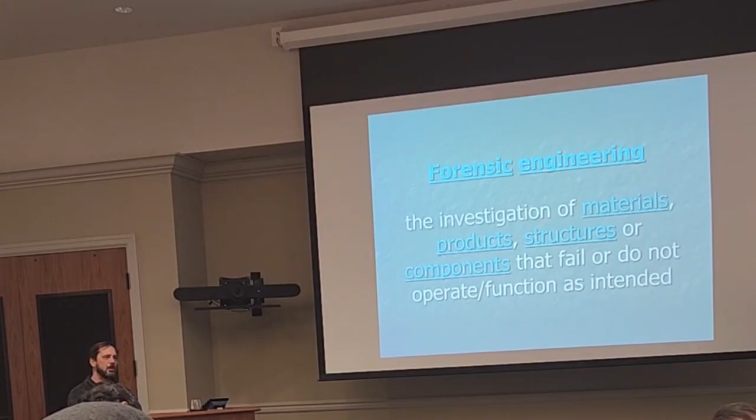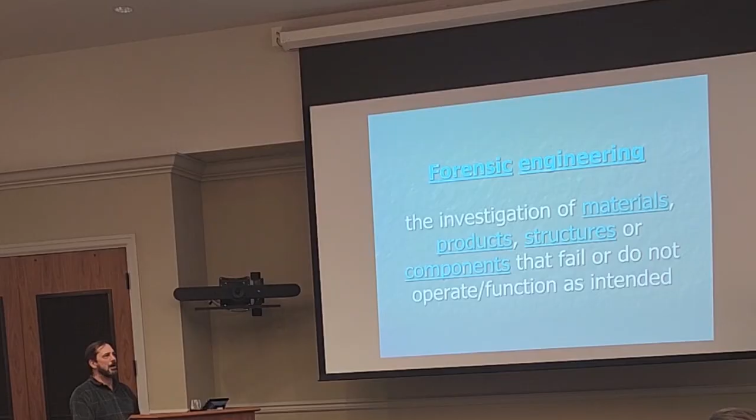Okay, so what do forensic engineers do? I kind of got into this in the Air Force a little bit. I was trained as an accident investigator. I've always been fascinated with figuring out the cause of failures and problems. And my background is in civil engineering and structures, and so forensic engineering is basically the use of that knowledge. I just apply that causation analysis to buildings instead of airplanes.

Just as everyone understands the scientific method, basically the whole process is to gather the information that you need, create a hypothesis, get your evidence to support that, interpret that, follow the facts where the facts may lead. Don't let your opinion drive the analysis, let the facts drive the analysis. Draw conclusions and publish the results. Of course, that's just one of the basic scientific methods, and that's what we have to employ.

But in my faith, I've learned that none of this would be possible if God had not created order in the universe. Because God's order makes the scientific method even possible. If there were not laws of nature, we wouldn't be able to recreate experiments and such. So, even in Romans 1:20, St. Paul is talking about that. Of course, he's addressing this to folks who didn't quite understand the concept of God.

We could probably use a little bit more of this kind of quote in today's world: ever since the creation of the world, His invisible nature, namely His eternal power and deity, has been clearly perceived in the things that have been made. So, if you can't see God, but you're looking at creation, you are seeing God. You're seeing Him through His creation. And so I let my faith guide my values as far as my work, and I'm going to talk a little bit about that today through some case examples.

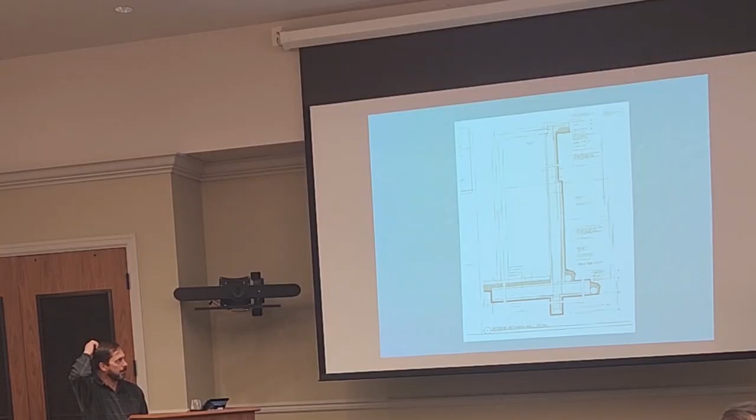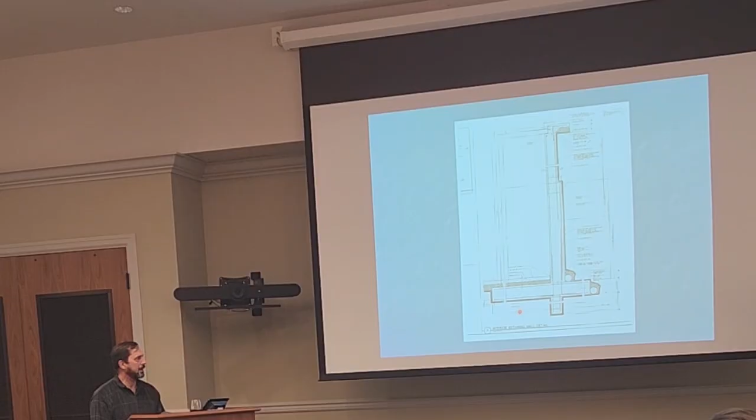The longer portion is actually on the inboard side, the loaded side of the dirt. So the dirt's going to go up on this side of the wall. A lot of times you'll see retaining walls, and the way they build them, the dirt will be on the other side with the longer stem acting as a sort of a retaining. But long story short, that was the question: was the wall not properly designed? We went through, here's what happened.

Very large structure. It was under construction. They had a huge rainfall event that came, basically washed in and collapsed a portion of the retaining wall. So we were hired to figure out, whose fault is this? Is this the designer? Did the contractor do something wrong? What's going on there? And we went through the analysis and found out that the wall itself actually was well designed. It was well constructed.

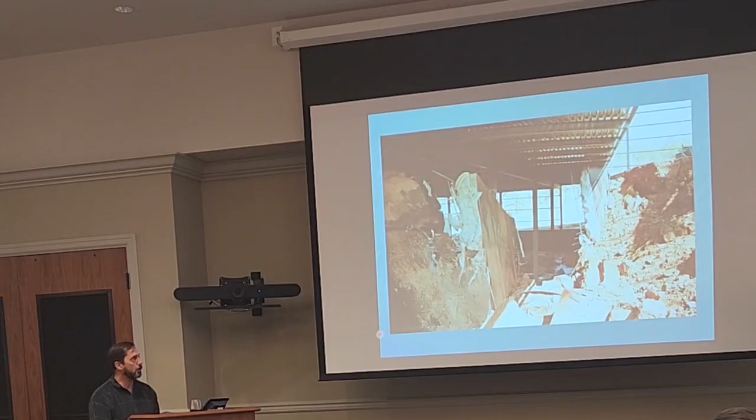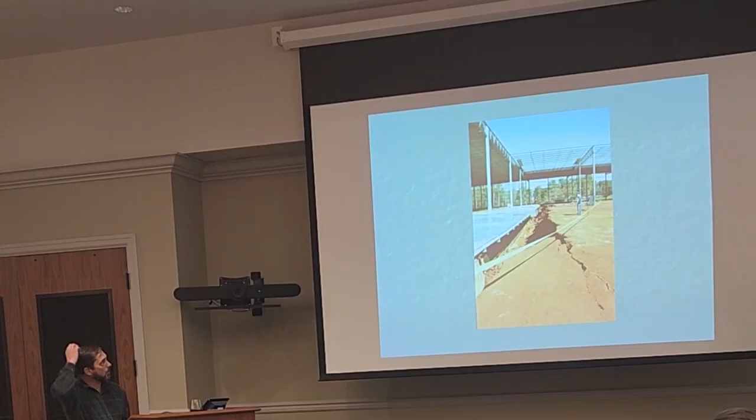This was the problem. This is the photo that kind of gives you the clue. The building is under construction, and as I said before, you can kind of see where they already put the roof decking on a portion of it, but not the full area. This area that you see on the right-hand side that's open was eventually going to be paved and covered. So the retaining wall was never designed to withstand any water load. It was designed for the soil load only.

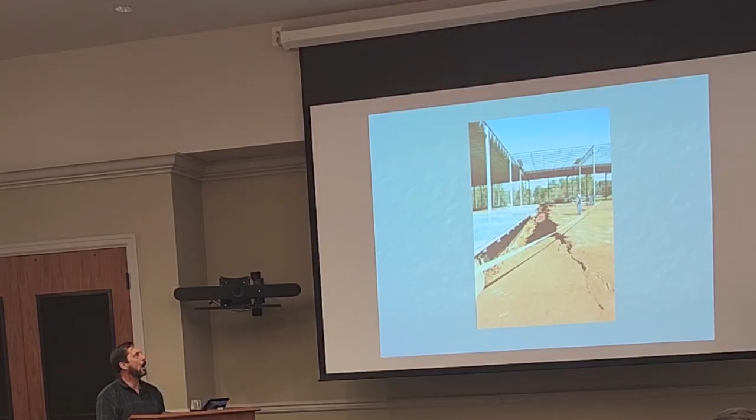And what ended up happening, there's another picture of the thing, was that you had this rainfall event during construction that loaded and saturated the soil, causing a surcharge that fractured the retaining wall. It wasn't able to keep up with that.

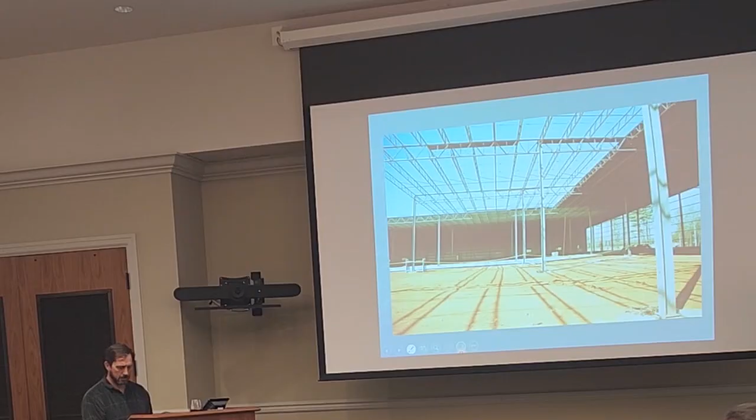Anyway, interesting thing there. This is another one way back when, Hurricane Katrina, 2005, I think it was. The Hard Rock Casino was being built. Back in Mississippi at this time, you could gamble, but the gambling had to be done on the water. It couldn't be done on the land, it had to be on a vessel. So they went to great lengths to construct the Hard Rock Casino on the water,

and the hotel portion and all of this entertainment was on the land. There's an overview of it, and you can see here's the structure we were just looking at. There's the giant guitar. They had a facility, a floating barge, moored permanently with a structure over the top of it, in order to be in compliance with the law.

And so the building never opened. It had just been finished about 3 or 4 days before Hurricane Katrina. The governor was down there and they were breaking the champagne bottle, getting ready to open up. So it was brand spanking new. Hurricane Katrina came through and wiped it out. So this is what it looked like after the event. And of course, this was an insurance claim.

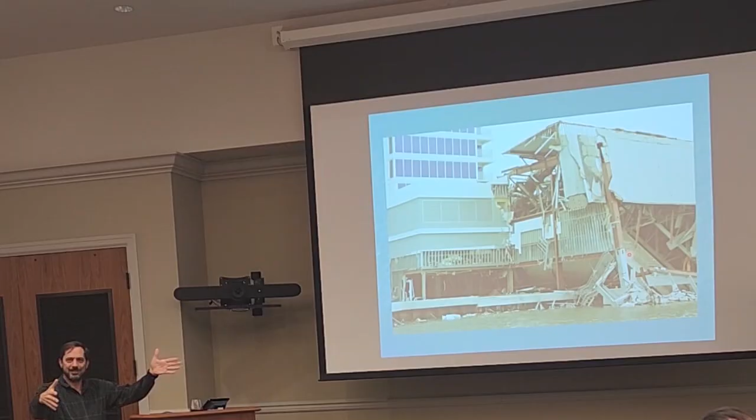These tanks or containers were designed to pump water out or pump water in to maintain a perfect level with the floor as the tide came in and out. So as the tide was going out, it would pump water out so that the floor would stay level with the entryway. It was very high tech, pretty cool.

This is a view looking down on the barge. You can barely see it, but if you look close, you can see some of the slot machines, never been used. They were full of money. They had cops out there 24/7 because this was like Looter Central. This would have been the part with the mooring, if you will. This was the portion of the roof right here. You're seeing the roof of the actual shed structure that covered the barge.

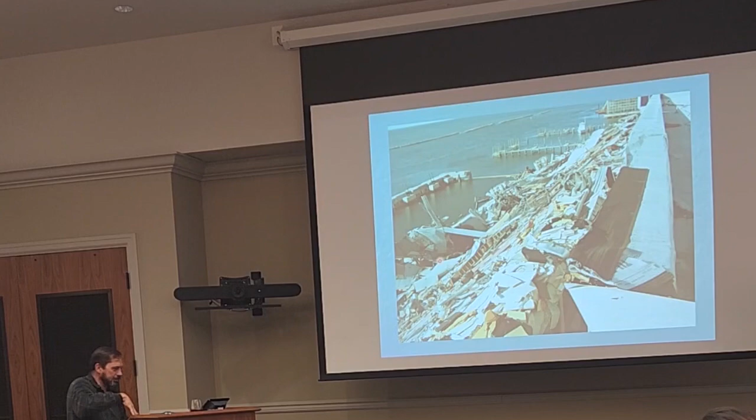It was detached and sitting on top of the barge, and the barge was now sunk into the water there. There's another view of that substructure I was telling you about. So next door was the parking garage, and it was three stories tall. On the second floor of the parking garage, the concrete exhibited evidence of uplift force. Okay. Concrete is great in downward force; you can drive cars across it, but it's not too good going up.

So we're looking at this going, okay, what's strong enough to heave concrete up? Probably not wind on an open structure where the wind's going to blow right through it. Probably water. So this is what it looked like looking land side. And off in the distance there were a couple of apartment buildings right across the street. So we went over there, took a look at the apartment buildings, went up to the second floor of the apartment building, and measured this from the ground level.

What you're looking at here is, see these little things in the wall? See how it's like a perfect line? What do you think that is? The flood line? Yes, it could be a flood line, right? But normally a flood line is identified by dirt, detritus, things like that deposited. You didn't really see that much, but what you're looking at here is where the furniture had been floating and banging into the wall. So that is a flood line that was created by the furniture.

So we were able to get a positive identification of the height of the flood level and kind of track it back, and it was quite clearly the barge floated up, detached its own roof, floated over the top of the moor, and then when the flood receded, that's what caused all the damage.

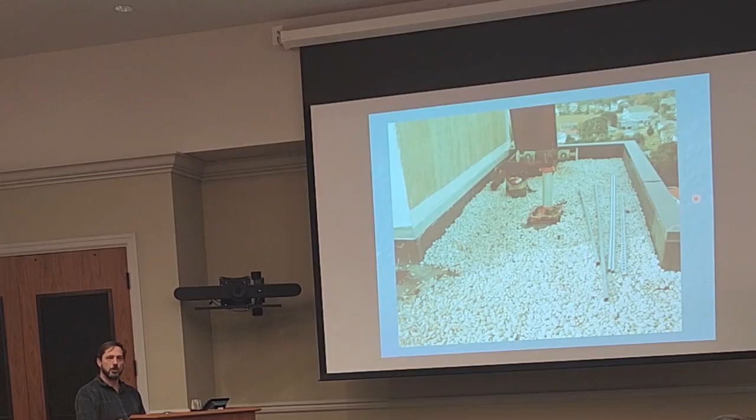All right, much simpler case, a little roof leak up in Horizon East condominiums in Myrtle Beach. The roof is a rubber roof, membrane, EPDM, for those who know what they're talking about. It is a pretty decent roof, but in order to protect it, they would cover it with this relatively large stone ballast. And next to the little penthouse stairs, that's a little rooftop compartment for all the elevator equipment, the pulleys and stuff like that.

I noticed a split in the membrane right there, and I thought, okay, what's going on? I actually had to brush some of the rock away to find it. I found the split in the membrane, and I said, this is interesting. It's about 4 inches wide. It's linear. It doesn't look linear there, but that's because the rubber had kind of stretched. If you stretch the membrane out a little bit, it was linear. And I said, this is interesting. It's perfectly in line with the treads of the stairs.

So I asked around and I said, hey, has anybody ever been on your roof? And they said, oh yeah, a couple of months ago we had some work done to the elevator. And I went, oh, okay. Well, looking around on the roof, I happened to find a couple of these metal rails here, and written on it was Draka Elevator Products, Inc., Wireway. And I said, it's the exact same distance as the other thing, so it became pretty apparent.

Of course, you can't prove it positively, but it looked like they were probably carrying these things upstairs. One of them dropped down and slid and sliced the membrane, and they were like, uh-oh, let's put some rock over it and walked away. That was probably what happened there.

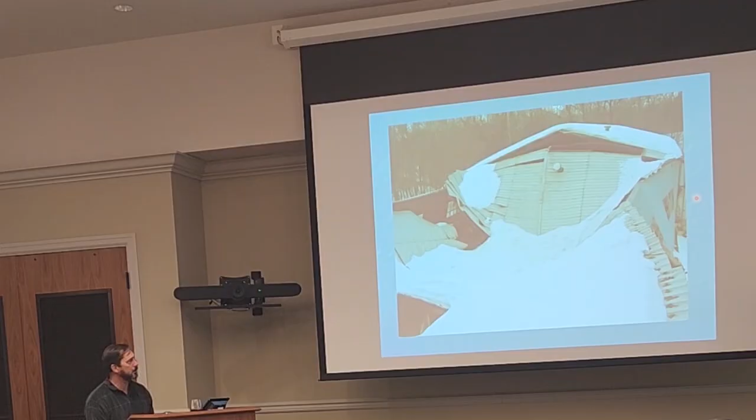This was kind of a place for them to store some extra stuff. But this was a relatively recent addition, within 5 or so years of the event. So looking in at it, we were measuring the snow and taking a look at the failure points.

This is what the frame connection looked like at the top of these metal frame buildings. It's old, but it's not in bad shape. It has some surface corrosion. It's not terrible. But there was one on the ground, though, that failed. And this particular photo kind of gives you the clue as to what happened.

And again, kind of going back to my faith, I've noticed that the world is full of patterns. If you can recognize the pattern, you may be able to solve some of these things by looking at the pattern of failure and what happens. And it's always a matter of trying to find the inconsistencies in that pattern.

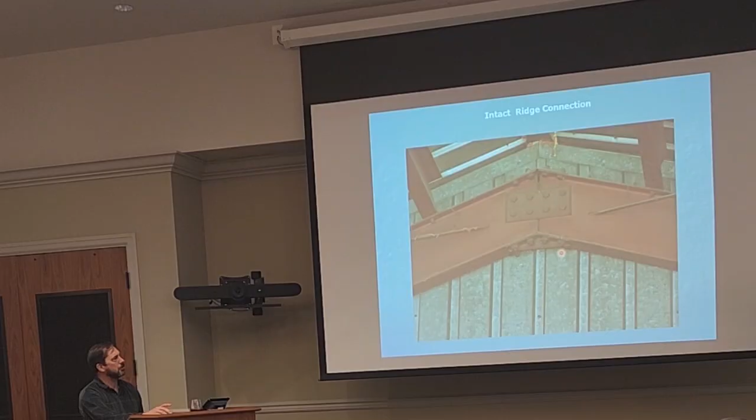But looking here, if you kind of go back, you see this is the connection point. There's a bolted connection for the two frames. Here on the bottom is another bolted connection for a support brace at the bottom connection. If you go back to this one, you'll see that everything is the same except for that bottom piece right there, which would be this right here. The bolts are sheared.

This is on the right-hand side, when you're facing that photo, the side of the building that had that additional shed roof. And the shear gives you a little bit of a clue. It sheared on the right side, on that particular column. So we were able to determine that when the addition roof loaded up, the original building was not designed for that additional snow load on that side.

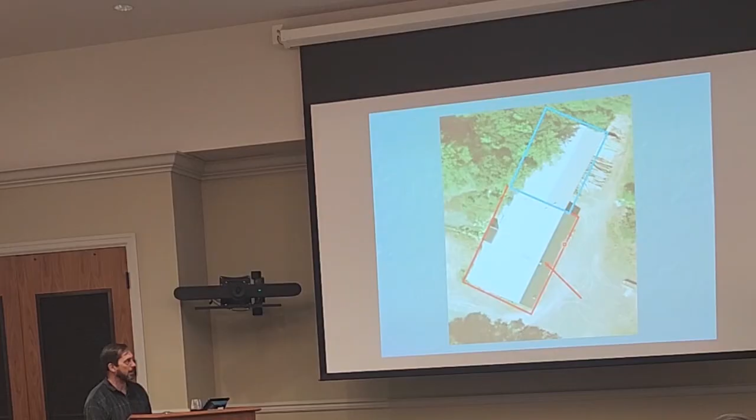Does your work determine which insurance company pays or who's at fault? I don't want to know. I try not to get involved in any of that. You don't have to. No matter who hires me, I tell them you're going to get the same answer. I'm just going to follow the facts and tell you what the facts say. That's what I love about my job, it requires a curiosity to the extent of crazy curiosity. Wanting to know and not stopping until I figure it out.

But all I have to do is search for the truth. And if you think about it, in our life journey that's all we're doing. We're searching for the truth. So for me, it's perfectly compatible with my faith. My faith, to me, is a search for God. And my job is a search for God's truth in whatever circumstance I'm put into. So it's kind of great. I don't have to play the lawyer game. I just say, this is what happened. And I find that most people appreciate that.

Although, Joe, you do get called in for deposition, things like that. Yeah, all the time, to testify at trial and stuff like that, it happens. But I typically will lead the jury through my investigative process similar to what we're doing right here. And I try to turn it into a little episode of CSI for them, because most of the time they're just sitting there. So it's kind of fun.

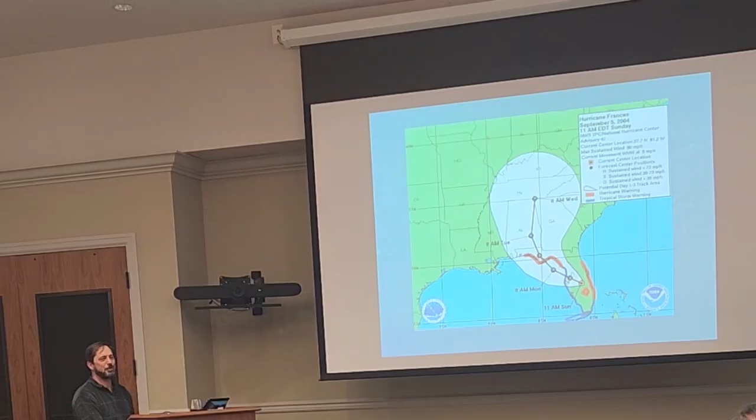Okay, so here we are, Hurricane Frances, Poinciana High School down in Orlando, Florida. This is back in 2004, Hurricane Frances came through. For us it wasn't bad, but in some parts of Florida it was pretty dang bad. This is an overview of Poinciana High School.

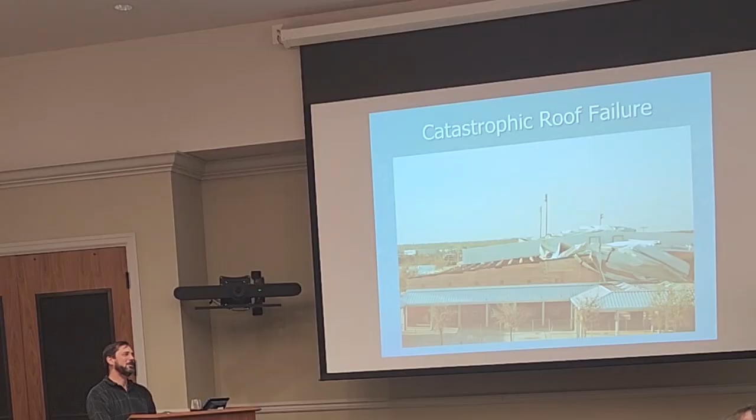Well, their gymnasium was a designated shelter during the storm. This is what it looked like after the storm. Catastrophic failure. So there you go, completely peeled off. Can you imagine being inside that thing when the roof was off? Oh my gosh, that would be bad.

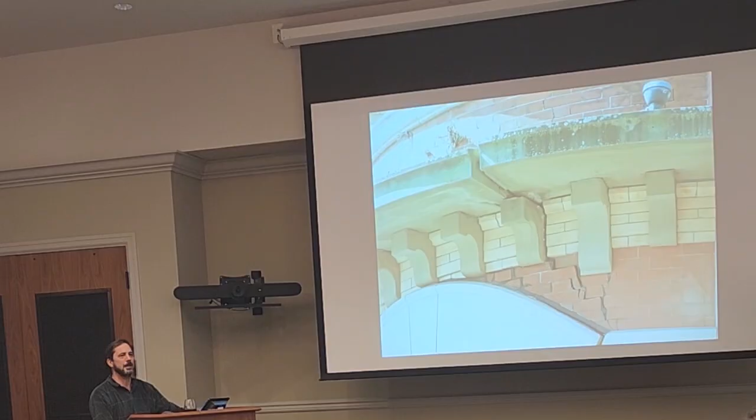So anyway, this is what it looked like. So they asked us to go and take a look at it and come up with a repair. So the first thing I looked at is I saw the granite arch. This is that little piece, one of the two that sits right here. So here we go. We have a piece of that granite arch. That's the support. Really, this is kind of supporting the whole thing.

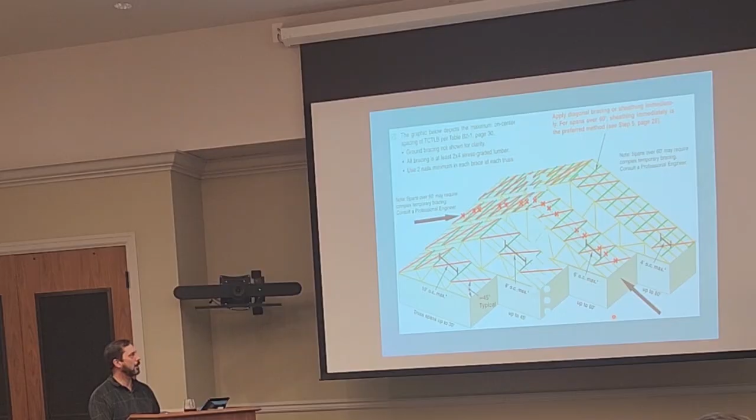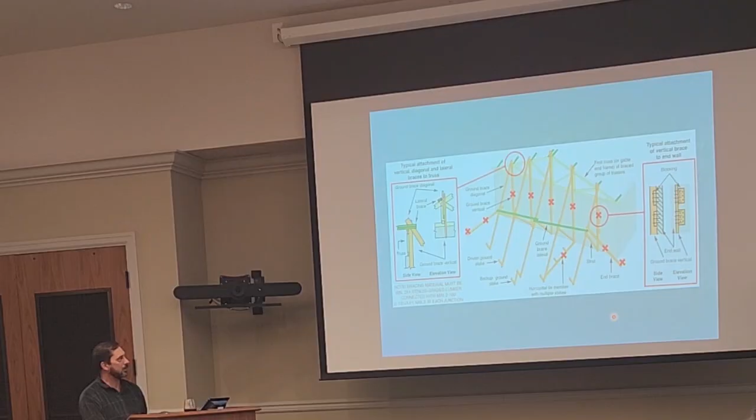So it was really a matter. You're also supposed to brace the sidewall against those kind of forces, and they had a little bit of bracing, but where you see the X's, there was no bracing. So they really did a poor job of bracing the trusses during installation. That's probably what led to it. So you concluded that the trusses started collapsing and that's what pushed the walls? Yes, actually pulled them. Right, pulled them together. Well, as they fell in, it kind of pulled them. It was more of a roof problem, sort of. It was an installation of the trusses problem.

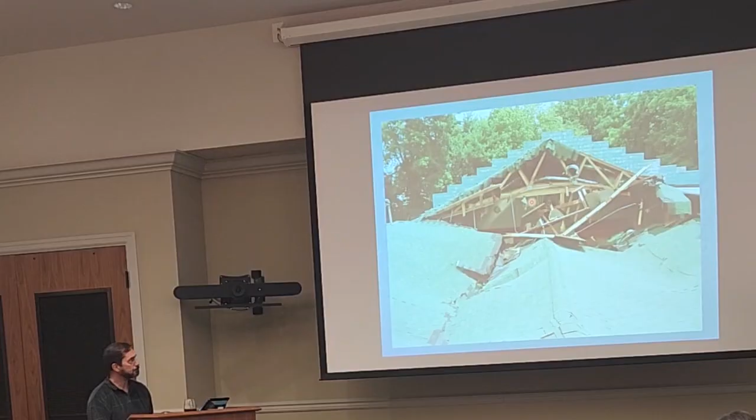So this is what it looked like from the inside, and part of my job is super fun. I get to crawl through the wreckage and try to figure it out. So this is what it looked like from the end of the trusses. So I started kind of working my way back through there.

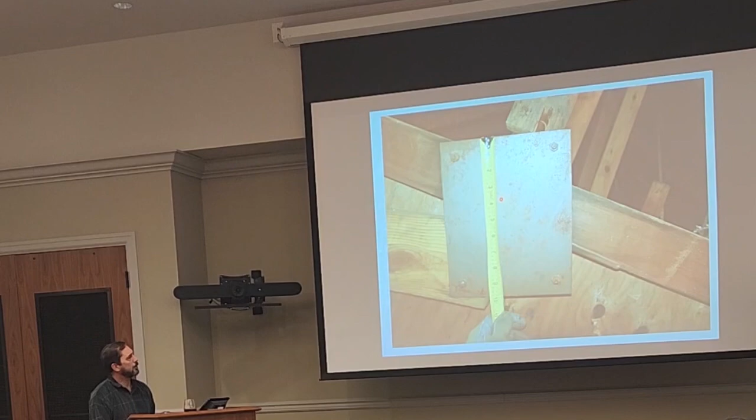Notice that these trusses are connected not with those metal plates like the standard ones, but this is an older building, so these would have been connected with these metal plates. All the joints would have been connected with just a single bolt to the metal plate connection. Most of these connections are in compression, so it's not a problem to do that, but it's just a different style back then. This was an example of the plate and how it worked.

And kind of working your way back through, I noticed that several of them had the tear out pattern, right, where there had been a bolt there, and it pulled through. This is the king post. This is that vertical piece that comes from the ridge. So that means it failed in tension, right? It got pulled. And you can see the outline of the plate where it had been sitting there for decades and decades. It just left an impression.

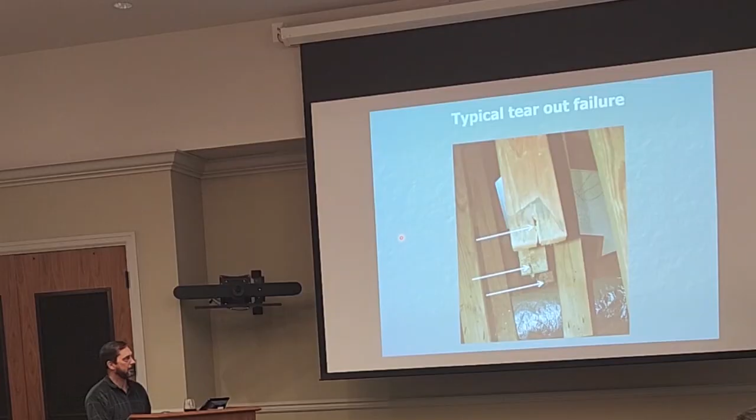So then all of a sudden I got back to around the centermost trusses, I think 15 through 20 or so. And that same center post was there, there's a hole, but the pattern changed. It went from a pull through where the wood was literally ripped out to the wood is intact with no removal, right? What does that tell you? Screws removed. No bolt, right, yeah, no bolt.

What do you think happened? Bolts weren't there. Exactly. They used it on the building next door. Yeah, the nuts had been there, the nuts had been backed out, the bolts had been removed from the centermost part. Whoever did this literally took his own life in his own hand. I don't know what they were thinking.